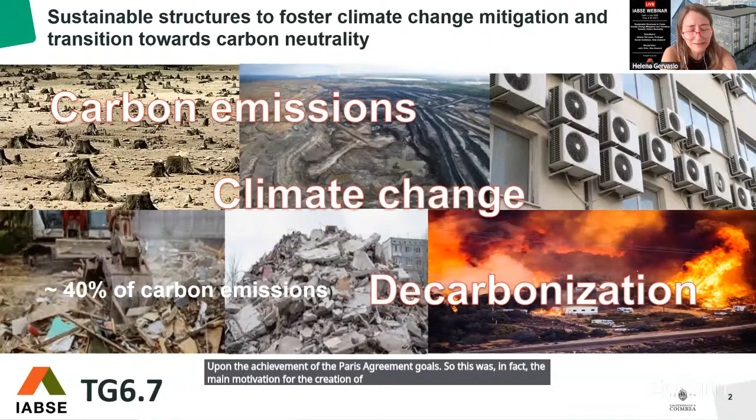So this is in fact a major problem of the construction sector, and we have a huge responsibility upon the achievement of the Paris Agreement goals. This was in fact the main motivation for the creation of this working group.

And although there is already a very big number of initiatives to lower emissions in the construction sector, as we can see here in the global building climate tracker, this dashed line represents our zero carbon building stock target in 2050.

What we are observing today is that we are getting further away from this line. If you see on the right side, we are currently 9 points behind this line. Compared with 2020, we are getting further away - okay, this was the pandemic year. So even if we forget about this, if we look at 2019, even here we can see that we are getting further away from our track. So it is really important - the reduction of carbon emissions in the construction sector is still a huge problem.

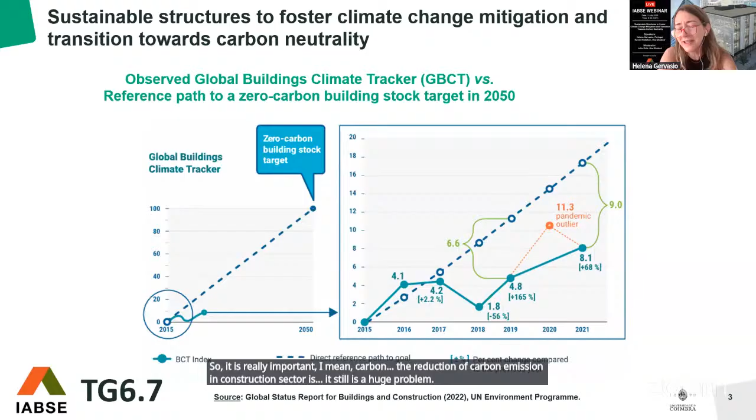As I said, this was one of the motivations for this task group. Our mission is to establish a framework for assessing the life cycle greenhouse gas emissions of structures and to foster the transition towards a low carbon built environment. We will also deal with other relevant emissions, because although greenhouse gas emissions are very important, there are trade-offs between environmental impacts, so we will also focus on highlighting other environmental impacts important for the construction sector.

So we created some topics for discussion among our task group. For instance, strategies to halt greenhouse gas emissions, focusing on the design of low carbon structures - and today we are going to hear about this as well. Also to identify main barriers and opportunities towards climate neutrality and sustainable construction, methodologies and tools for the life cycle assessment of construction works, and carbon environmental footprint and benchmarking of civil engineering structures.

I just want to highlight that our goal here in this task group is mainly focused on buildings. This is because there is already another task group currently working on bridges and other infrastructure, so to not overlap the work of these task groups, we are going to focus mainly on buildings.

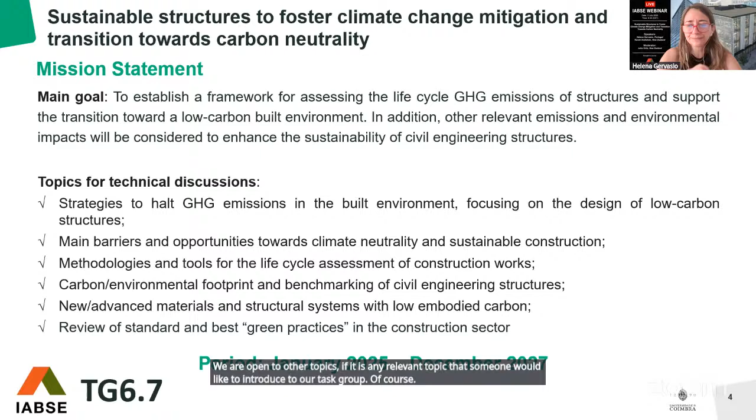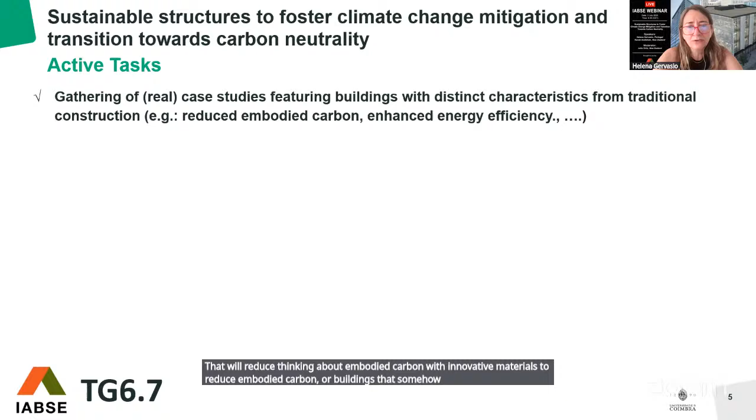Now I'm going to talk a little bit about what are the active tasks currently. One of the tasks now is gathering real case studies featuring buildings with distinct characteristic constructions - for instance, buildings that were designed thinking about embodied carbon with innovative materials to reduce embodied carbon, or buildings that enhance energy efficiency, close to net zero buildings, and so on.

The type of data that we are looking for is from design offices, from contractors, because we don't want to see only the production or construction stage, in terms of the type of build or material used, or design strategies - we would also like examples of construction practices in terms of the lifetime of the buildings, for instance adaptability, refurbishment, and so on. And of course, at the end of life stage, buildings that can be demounted, that are already being used, and so on.

So this is the kind of case studies that I would like. I call again to all of you watching today - if you are involved in design offices, working for contractors, and have access to such data that you're willing to share with us, please join us or contact us, because we really would like to build this collection of case studies. As Julie was saying at the beginning, one of our goals is to publish an IABSE publication with these case studies.

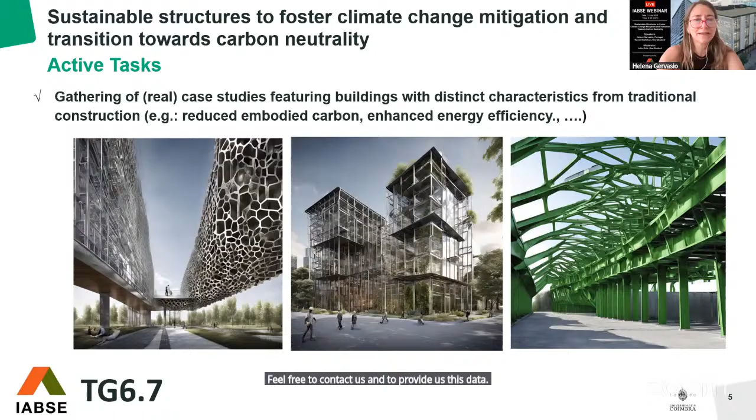So this will be one way also of promoting your work. Please feel free to contact us and provide us this data. So this is one of the active tasks.

The other task we are currently developing is the benchmarking of building structures. Here the approach will be the following: we would like to collect building data, but in this case general building data. I'm not focusing only on special types of buildings that differentiate from others. We are looking for all types of buildings, conventional buildings, but also good or improved buildings, if you wish.

But in this case, what we would like to have is not really the building as a final product. We would like to go into details, into the bill of materials of the building.

And why? Because we would like to produce some benchmarks, and to produce benchmarks, as you know, we need a common base for comparison. I suppose you are all aware that currently there are already some reference values all around the world for buildings, for the embodied carbon of buildings, for instance.

One of the limitations of the existing values is the way they were developed, because as far as I know there are already some databases for this kind of data. But as far as I understand - and this will be open for discussion - one limitation of the current databases is that they don't have the same basis for comparison.

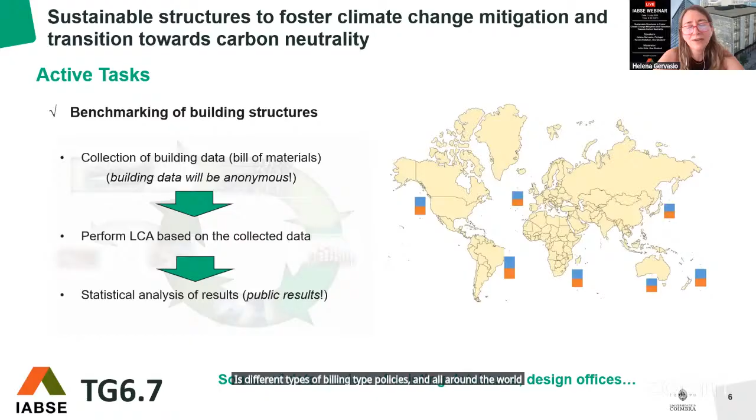So in the end, what we would like to have is this type of reference values all around the world, not for a specific place, because we know there are specificities around the world in terms of seismic area, for instance, and other loading conditions. So it is not possible to have a single value for the entire world, also for different building typologies. What we would like is different types of building typologies all around the world, so we can have these different reference values for the world.

Another active task is the review of guidance and recommendations towards a low carbon design of structures and infrastructure. There are many different guidance documents currently available, and the idea is to make a collection of this data and review it. We will review and discuss some of these guidelines, and promoting this kind of discussion is also one of the missions of our task group.

Over our period, we'll promote webinars and podcasts with discussions about these different strategies. The expected outcome, as Julio already explained, is first to provide guidance and recommendations. So we'll have a book with such guidance and recommendations based on the review we carry out, the discussion of the different available documents, and also a set of benchmarks for building structures. That will be one output, and the other output will be the portfolio of case studies.

So that's the first task I mentioned. In this case, we'll have this publication but with real case studies. That's why I said this is also one way of promoting the work that you are doing, so I think it's good for you to share your data with us.

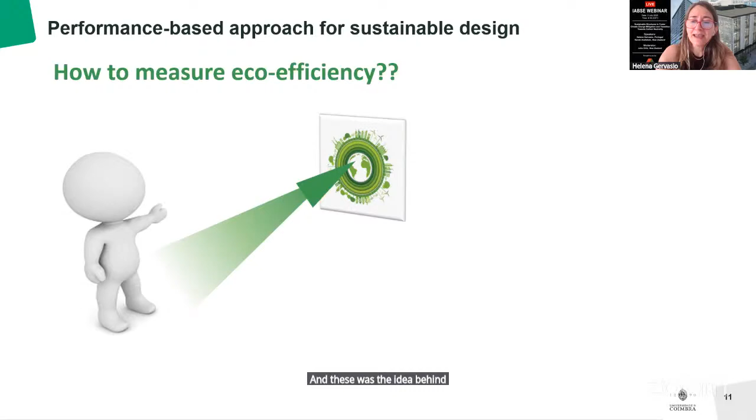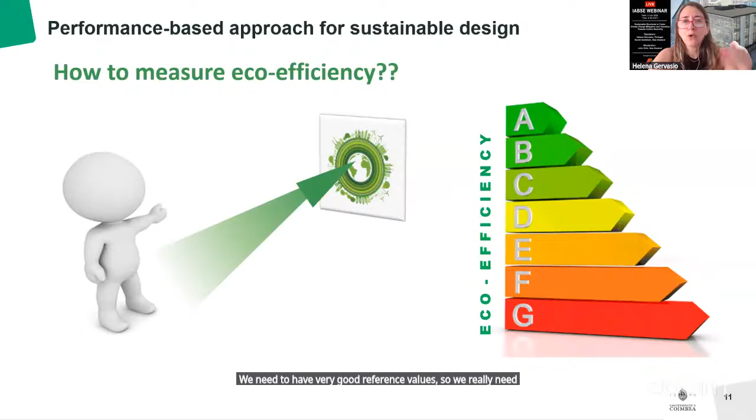The idea was to have a model for sustainable design in which we could compare the performance of our building with a reference value. This idea is based on a limit state function, which is the philosophy behind the Eurocodes for structural design in Europe. That is the limit state function in our Eurocodes.

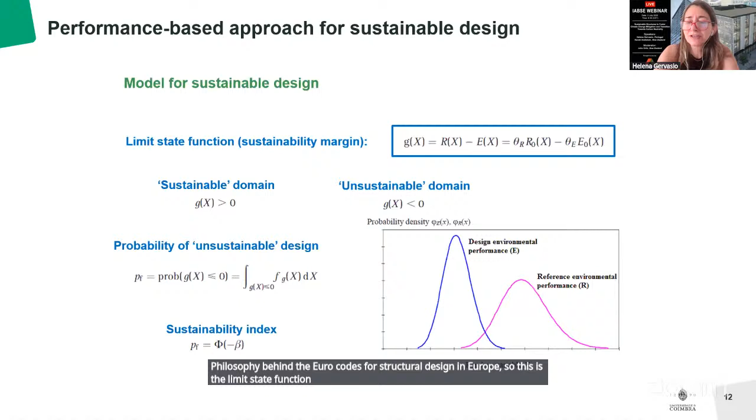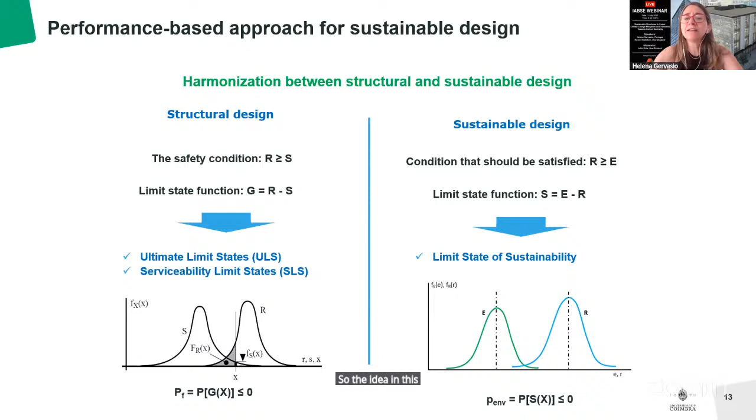The idea was also to harmonize structural design with sustainable design. As the Eurocodes in Europe are based on this limit state approach, the idea for sustainable design was also to have a limit state function. The main reason behind developing this approach was to harmonize structural design with sustainable design, empowering structural engineers to foster both safety design and sustainable design, aligning with environmental goals such as embodied carbon. So the idea in this project was really to define this limit state for sustainable design.

The methodology was somehow similar to the one I described for the task group. The first idea was to develop a comprehensive model for LCA, so a model was created so that all buildings were calculated based on the same model. A standardized approach was considered because we need a very good LCA model.

The model was developed according to the European Standards for Sustainable Design, EN 15804 and 15978. Based on this model, we collected building data, focusing on the structure. As in our task group, the idea was to limit the analysis to the structural system of the building, focusing on residential and office buildings. We collected data based on the quantities of materials for the structures, and according to the model we developed, we quantified the benchmarks.

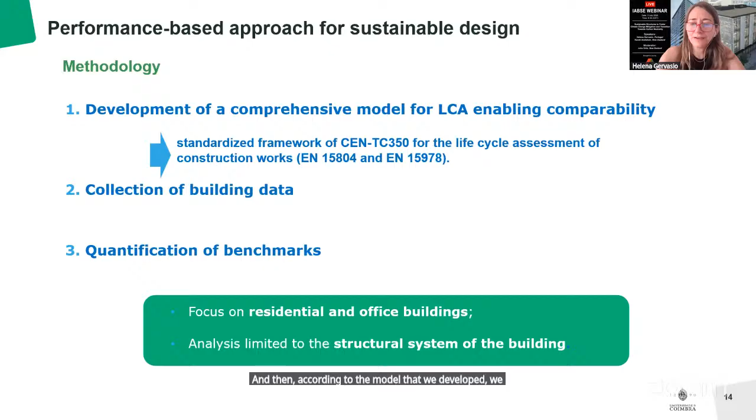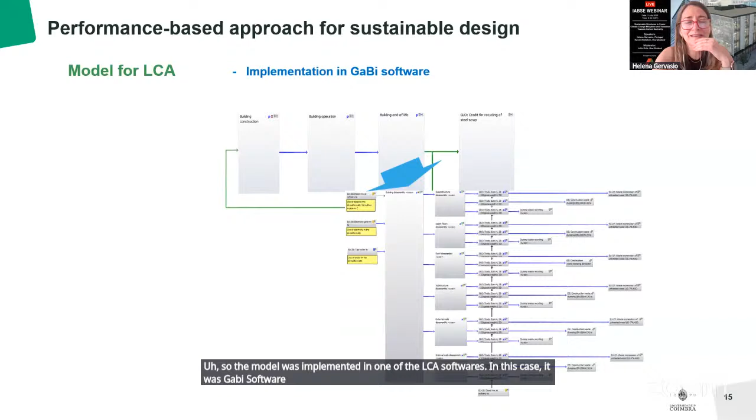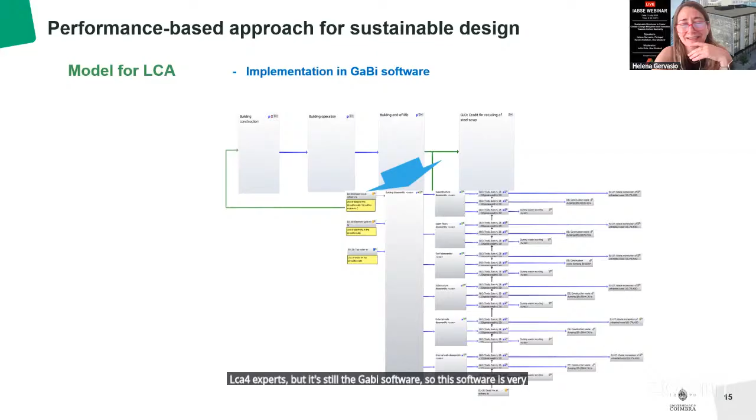The model was implemented in one of the LCA softwares, in this case Gabi software. Gabi has now changed its name, it's called LCA for Experts now, but it's still the Gabi software. This software is very interesting for those familiar with it, because it allows you to create a parametric model, and this is one of the models we can also use in our task group.

This model takes into account the complete life cycle of the building, not only the production stage, according to the European standards. We have a standardized bill of materials. This bill of materials can be improved, and it will be improved in our task group before sending it to potential contributors. But it already allows us to perform the LCA of the building.

This kind of tool ensures that we have the same basis for comparison. The results from the models will be based on the same tool, and this ensures that we have the same basis for comparison.

This model also integrates different types of materials, we are not only focused on one type. This is also the idea of this webinar today: to call for persons involved in all types of construction - steel, concrete, wood construction. We'd like to have all these types of buildings in our task group.

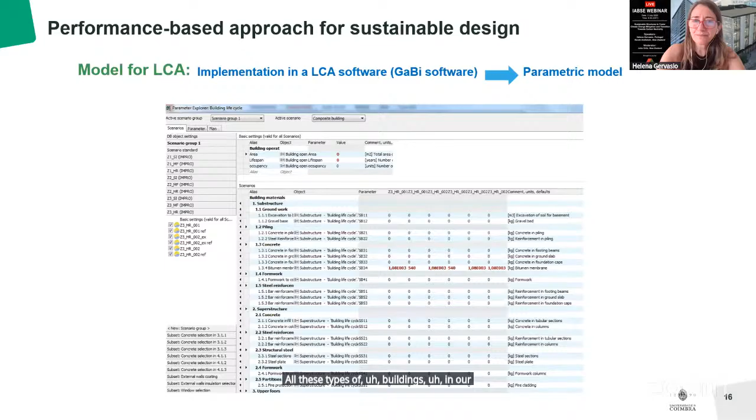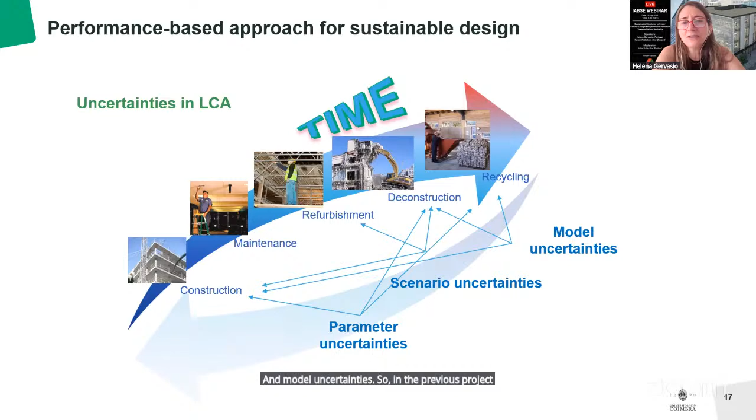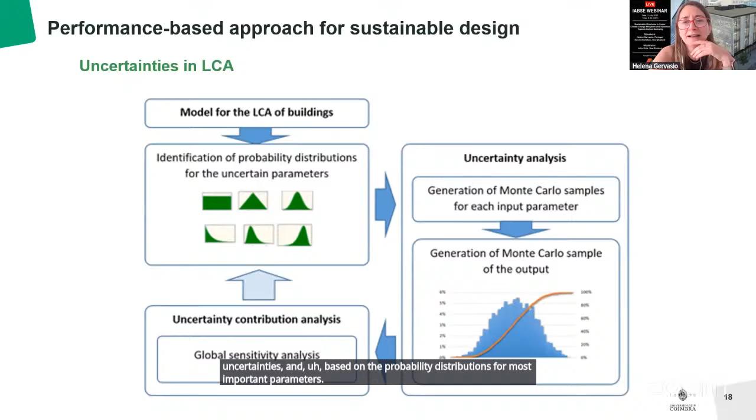For the model that was developed, because it was based on the life cycle approach, we know this approach cannot skip the amount of uncertainties involved in terms of parameters, assumptions, scenarios, and model uncertainties. In the previous project this was taken into account - we considered the different types of uncertainties, and based on probability distributions for the most important parameters, the uncertainty analysis was carried out by Monte Carlo simulation.

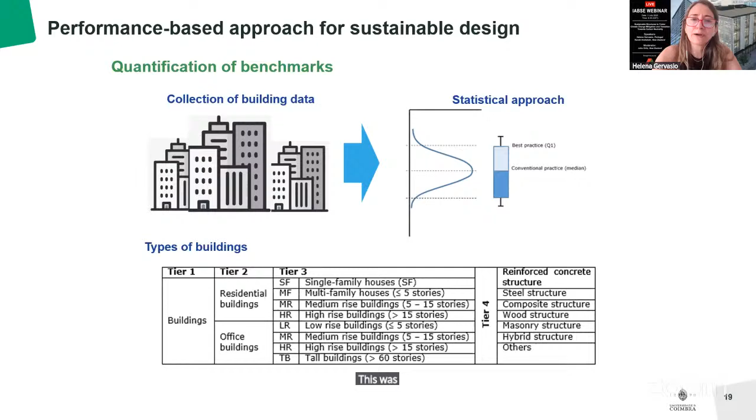Based on the collection of case studies and the statistical analysis carried out on the different buildings, the buildings were classified according to the table you see below. The focus was residential and office buildings, but then a different classification was done in terms of the type of building, the number of floors, and the type of structure - whether reinforced concrete, steel, composite, and so on. This was the type of data we were looking for at the time, and that we are looking for now as well.

As I said, it's not possible to have just a single value for the entire world, because there are differentiation factors. For instance, climate region is not that important in terms of the structure itself, but it can be an impact factor. We also have different seismic regions - just in Europe, but around the world as well - and the structure is very much dependent on this. We cannot compare a structure designed for a building with high seismic risk to one with low risk, so we have to take into account these differences, and also other vulnerable regions, for instance in terms of climate change, which we are expecting to change as well.

Even the Eurocodes now are already taking this into account, and we have to consider this too. This approach can somehow be considered as a national annex. So in terms of the Eurocodes for structural design, we already take into account differentiation factors—each member country in Europe has their own national annexes where specific aspects are considered. The same can be considered for the sustainability limit state.

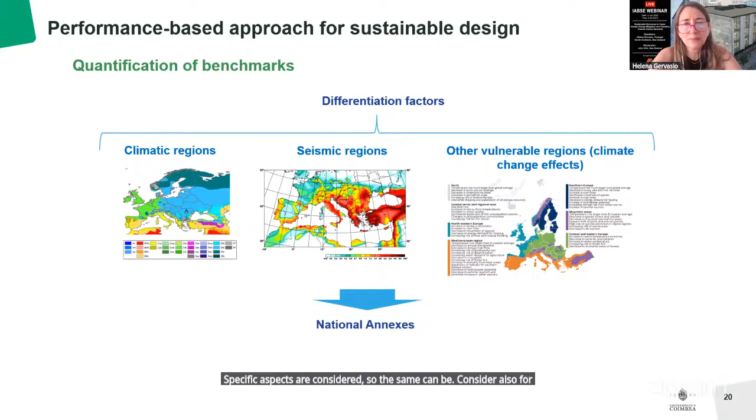A4, A5 is the process stage. Modules B are for the use stage. Module C1 to C4 is for the end of life stage. And module D allocates the benefits and burdens due to recycling and reuse of the structure. So we took into account the complete life cycle of the buildings, and that's why we were able to calculate the different values for different stages.

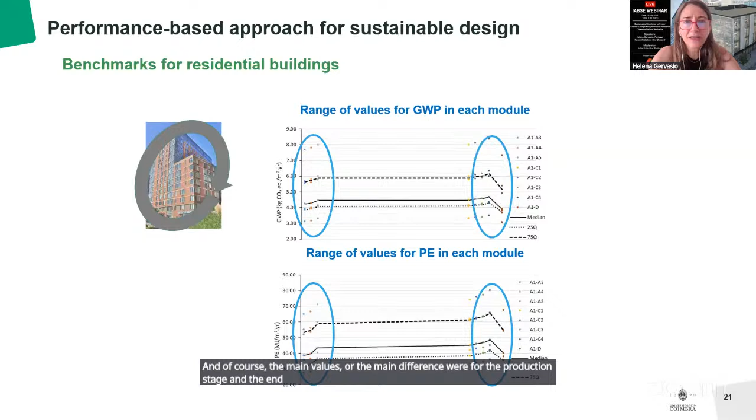In this case, on the upper part we have the global warming potential, the carbon emissions, the greenhouse gas emissions, and below we have the primary energy for each module. The main differences were for the production stage and the end of life stage. These were the values obtained for global warming potential and primary energy, focusing on the production stage and on the complete life cycle of the building, modules A1 to D.

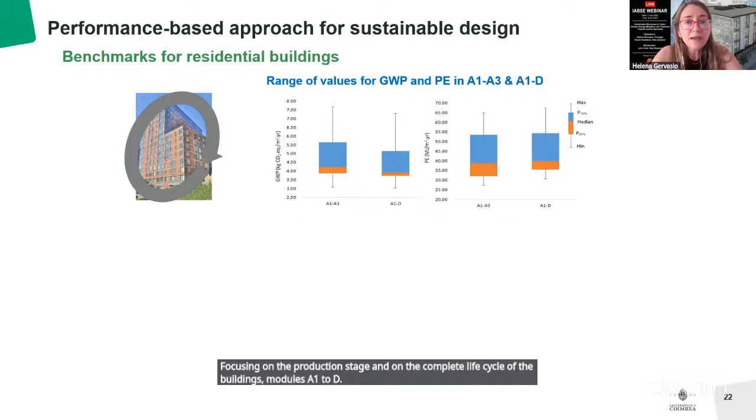But of course we carried out the LCA not only in the deterministic way, but also considering all the different uncertainties. The uncertainty propagation was carried out, as I explained, by Monte Carlo simulations, and then we got to the final distribution of the global warming potential values for the structure. We were focused at that time only on the structure of the building.

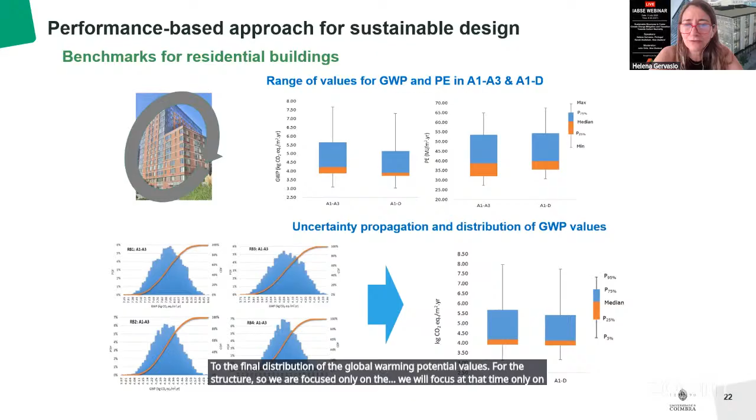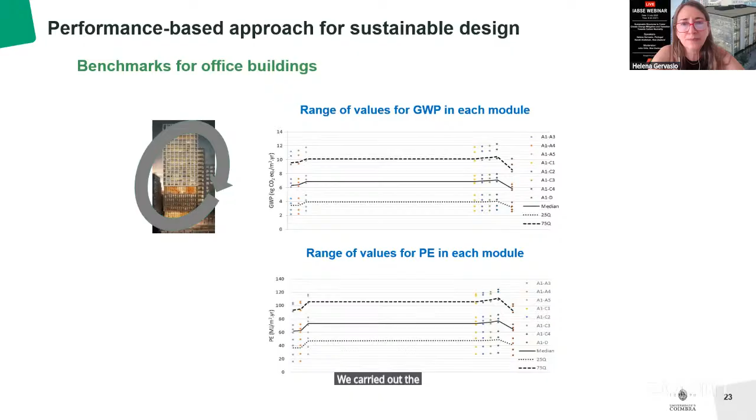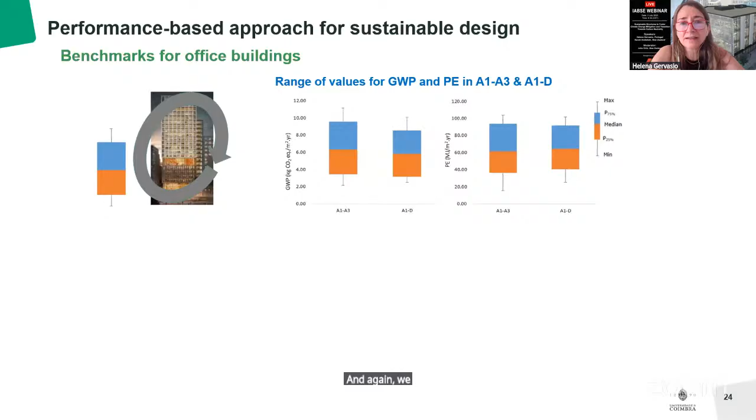And we did the same for office buildings. Again, we collected all the data and carried out the LCA of the office building, so we have values for all the different modules over the life cycle of office buildings. Again we carried out the statistical analysis, but we also took into account the uncertainties on the buildings, and then we got the final values.

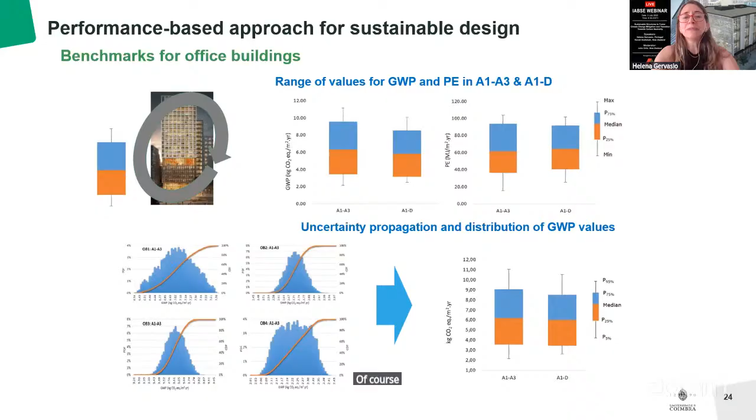Of course there were some limitations in the previous approach, and the main limitation was developing this resistant function, let's say—the resistant function here in comparison with structural design. So the resistant function in the sustainable design is our target value. How can we define this?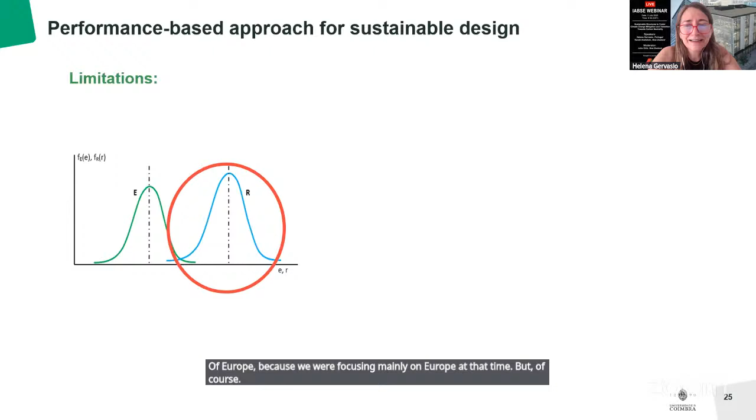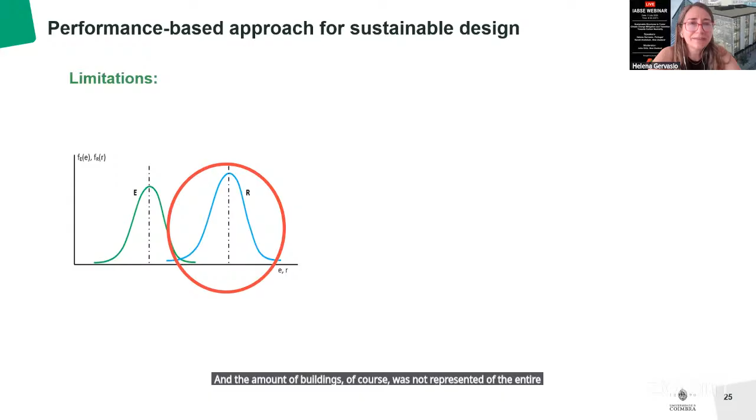In the previous project we collected building data, but the amount of buildings was not enough. The statistical analysis was limited because the sample of buildings we had at that time was not really representative of Europe, since we were focusing mainly on Europe. The time constraint was also a problem because the project took only two years, and the amount of buildings was not representative of the entire Europe. So this was one of the main limitations of the project.

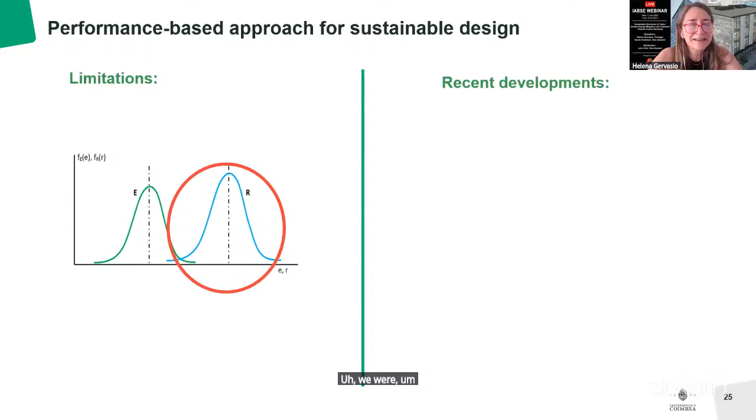There were already some recent developments done at the University of Coimbra. Currently we have new developments building on the previous project—for instance, for a special type of structure, industrial buildings, we have a very huge sample of such buildings. We did the design of many types of buildings, also using genetic algorithms, to create a very huge database of such buildings, allowing us to have a more comprehensive database.

So we were able to calculate the global warming potential of such buildings, and we have a resistant function for industrial buildings, but in this case it's mainly steel buildings. Based on this curve, once we have these target values, we can classify the buildings or establish some classes for the buildings, as I said in the beginning.

So once we have the target value, we can see where we want to be, whether in class A or A plus plus, or just go to the mean value. One big difference is between the structural limit states and the design limit states. In this case, we don't have collapse of the building, but we really want to be sure that our building has a very good performance.

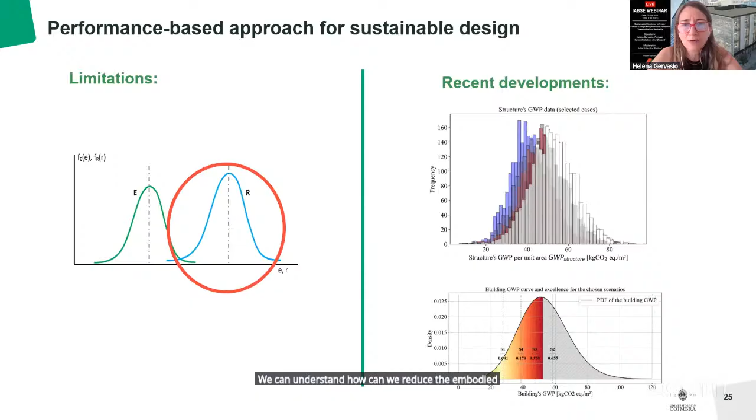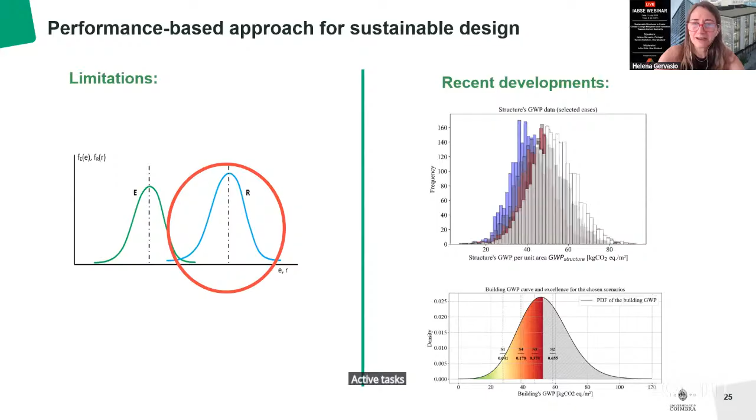With these kind of resistant functions, we can understand how we can reduce the embodied carbon of our buildings. This project was somehow supporting the approach that I was explaining, and this is one of the active tasks in our group. If you are interested, there are some publications from the previous project available online.

Today I'm going to briefly talk about some key results in our circular low carbon building design project, led by HERA and co-funded by Heavy Engineering Research Levy and Building Research Levy BRANZ New Zealand.

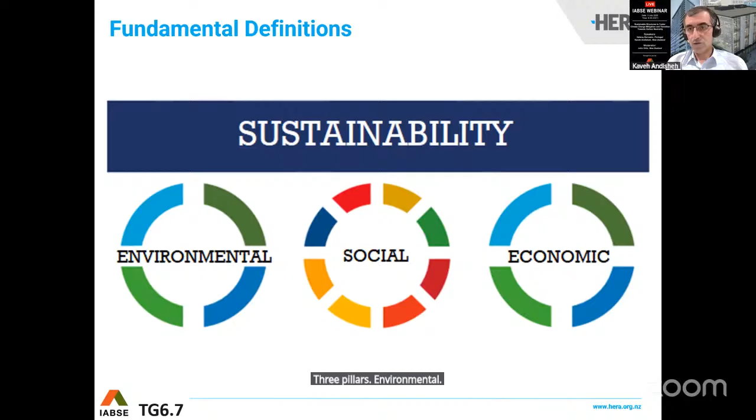I would like to start with fundamental definitions. The first, sustainability. Reminding that sustainability has three pillars: environmental, social, and economic impact.

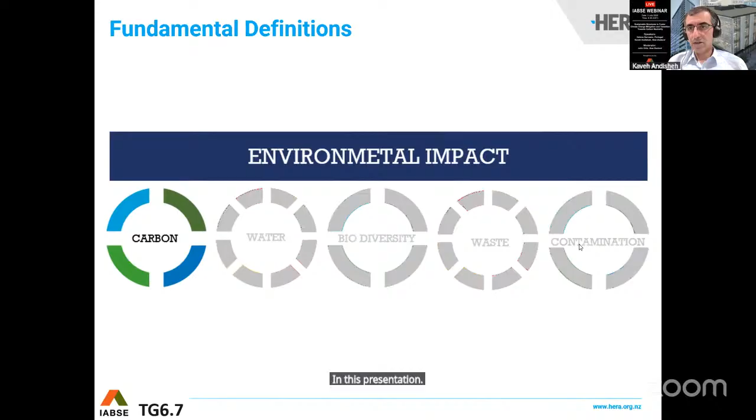Environmental impact has many key environmental indicators, including but not limited to carbon, water use, biodiversity, construction and demolishing waste, and contamination. In this presentation, we will only focus on carbon.

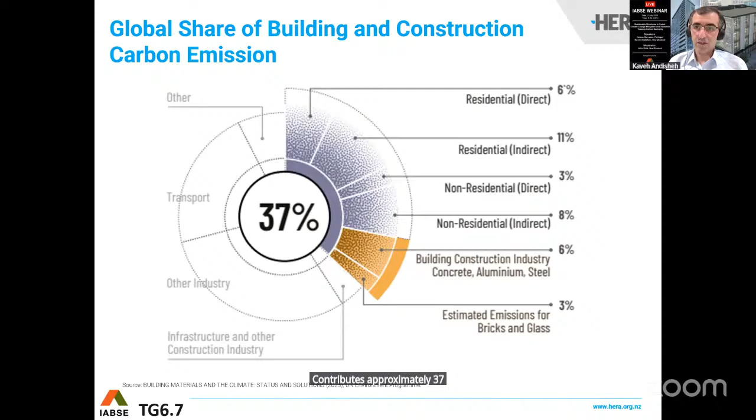Building and construction, as mentioned previously in the previous presentation, contributes approximately 37% of the global carbon emission.

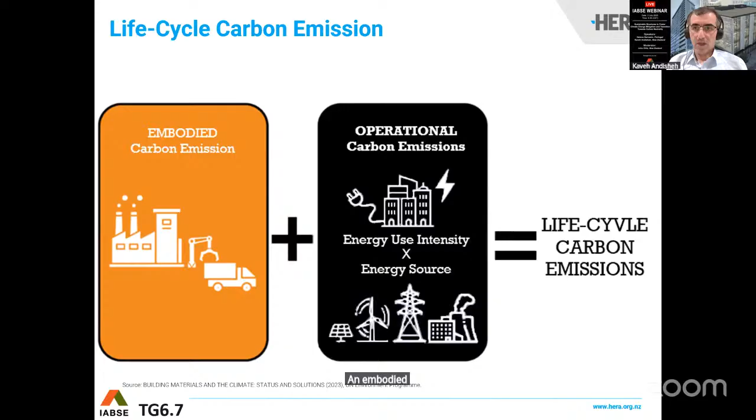When we talk about life cycle carbon, it has two parts: operational carbon emission and embodied carbon emission. According to UN Environmental Program and Global ABC, operational carbon is approximately responsible for 75% of the whole building sector carbon emission, and embodied carbon contributes the remaining 25%. Operational carbon is associated with B6 energy usage and B7 water usage, and embodied carbon is associated with all other modules in the life cycle.

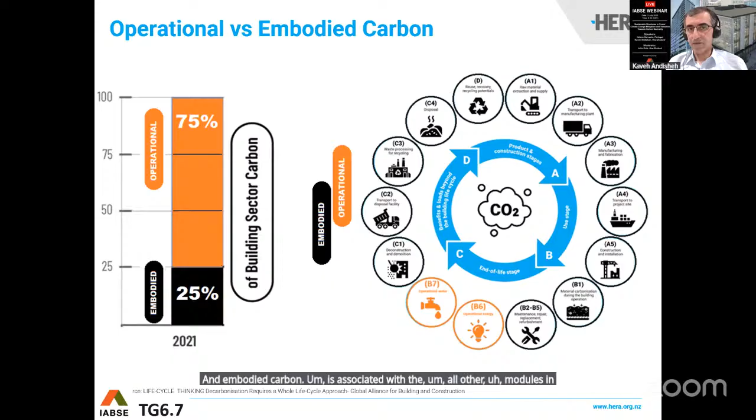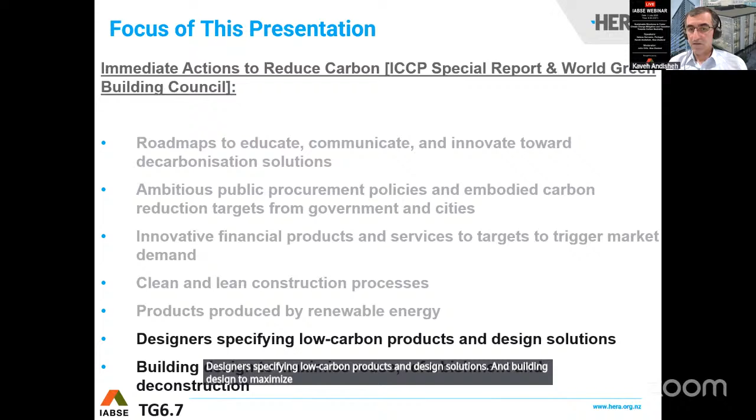The first one is building design. The main thing regarding building design is what design step you need to choose strategies and solutions to reduce carbon.

According to global feedback from industry, including New Zealand, the best optimum step to implement strategies and solutions is around concept design, before prelim design. One of the key reasons for this is that at project initiation, the ability to influence carbon is high, and the cost related to implementing solutions is low.

But as the project progresses, the ability to influence carbon reduces and the cost associated with implementing solutions increases. That's why the optimum stage for design is really important.

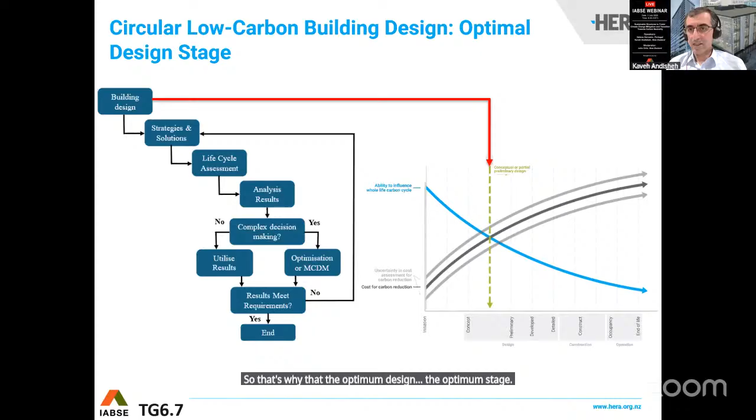The second key step, which is very important, is selecting appropriate strategies and solutions. In our research program, one of the key deliverables was the development of a comprehensive unified hierarchy, including all strategies for existing and new buildings.

Built on existing hierarchies in the literature like LETI and IStructE, this novel hierarchy of strategies can be categorized into 4 groups. The first group is 4D strategies for new building circular design: design for longevity, design for adaptability, design for disassembly, and design with circular materials.

The second group is 4R strategies for existing buildings: building reuse through retention or refurbishment, adaptive reuse of the building through repurposing, disassemble, reclaim and reuse in new buildings, and demolish, recycle and rebuild. Even if you need to demolish an existing building, this strategy encourages you to consider partial demolishing rather than demolishing the whole building.

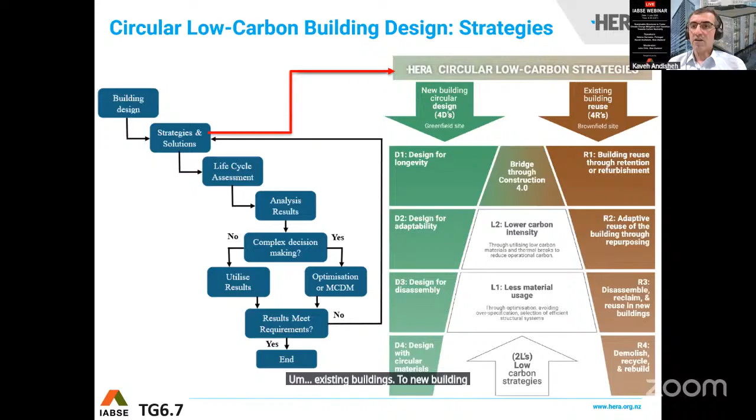Construction 4.0 has a hybrid role; like any other strategy it encompasses many solutions, but it can also bridge existing buildings to new buildings by utilizing novel technologies like, for example, digital twin, 3D scanning, drone. Construction 4.0 can contribute to development of construction guidance, which currently is one of the most critical gaps in the context of sustainable building design.

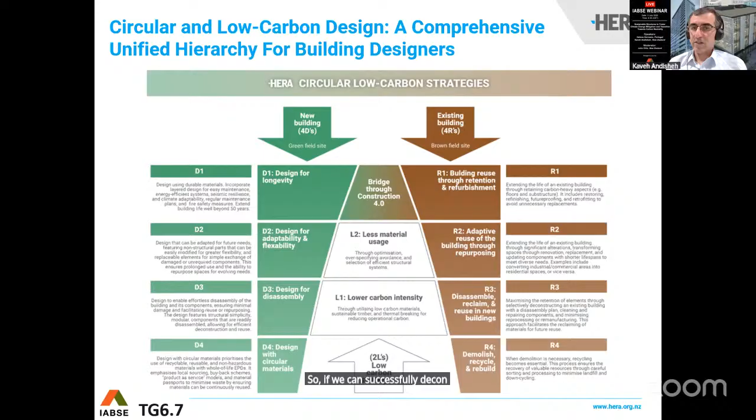And existing buildings can be deconstructed rather than being demolished. If we can successfully deconstruct existing buildings, their materials can be used in future new buildings. So each strategy encompasses several solutions. It was our intention in proposing these solutions to ensure they are readily available and possible to implement in New Zealand and globally.

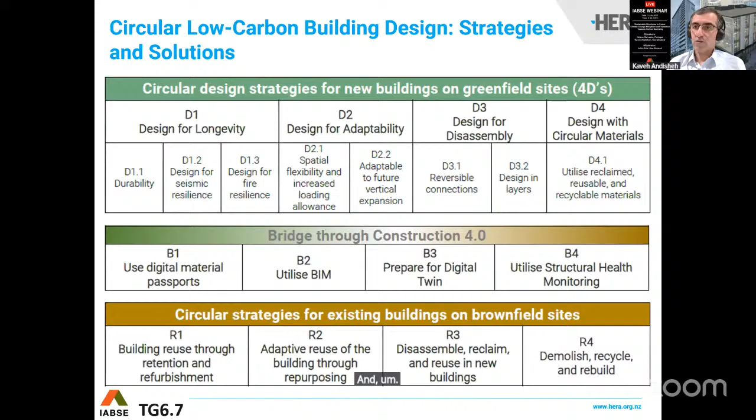So if you are interested, you can refer to one of our reports, R4-164, Low Carbon Circular Design Guidance Framework, which is free to everyone on our website. You can download it and read these documents for more information.

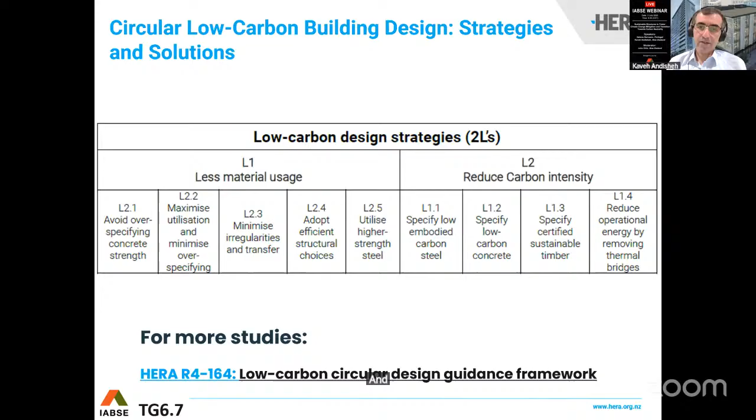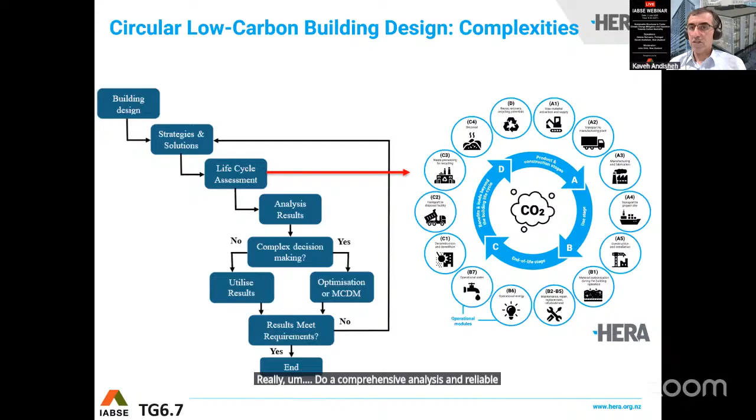The third step in circular low carbon building design is life cycle assessment, which is a key part. It is very important that when you do life cycle assessment, you consider the whole life cycle. Considering only a part of the life cycle, like A1 to A3 or A1 to A5, will just provide misleading information and doesn't provide comprehensive information. To do a comprehensive analysis and get reliable results, you need to consider the whole life cycle.

However, implementing circular low carbon building design may provide some complexities. One complexity is about the various environmental key indicators discussed in previous slides. We all agree that carbon reduction is important and carbon is a very important key environmental indicator, but it's not the only one. What about construction and demolition waste? That's very, very important. What about biodiversity? By adding these, we increase complexity.

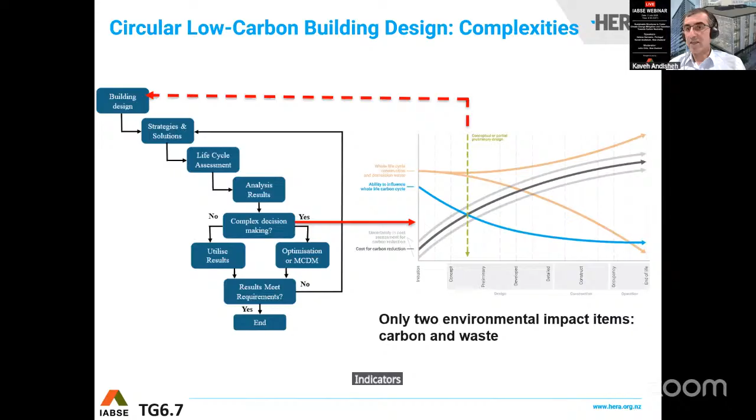For example, if you look at the figure on the right-hand side, regardless of what strategies and solutions you implement to reduce carbon, that may lead to an increase or decrease in construction and demolition waste. And if you consider other key environmental indicators, that complexity becomes even more important.

Another source of complexity can be due to tension between circular and low carbon design. Any circular solution may not provide a lower carbon solution, but low carbon strategies may not lead to circular solutions. An example is when you replace a circular building element with a low carbon element that is not circular. There is another source of complexity which arises when you replace materials and building and structural systems.

So when designers replace building and structural systems, they may significantly impact building performance - structural performance like seismic performance, fire performance, acoustic and durability performance. So the comparison wouldn't be an apple-to-apple comparison. It is important to acknowledge this complexity, and if there is a complex situation, you may need more tools and further advanced analysis to inform decision making, like multi-criteria decision making.

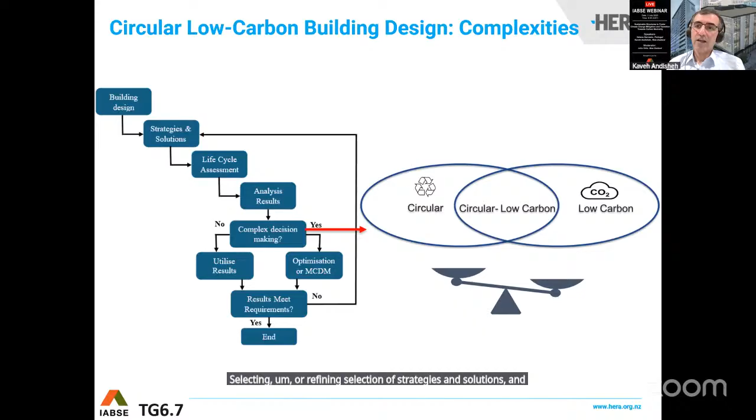The last step in the flowchart is comparing the results with the target. If results meet the requirements, then the process is completed. Otherwise, you need some iteration - you need to go back to selecting or refining the selection of strategies and solutions, and repeat those steps until results meet requirements.

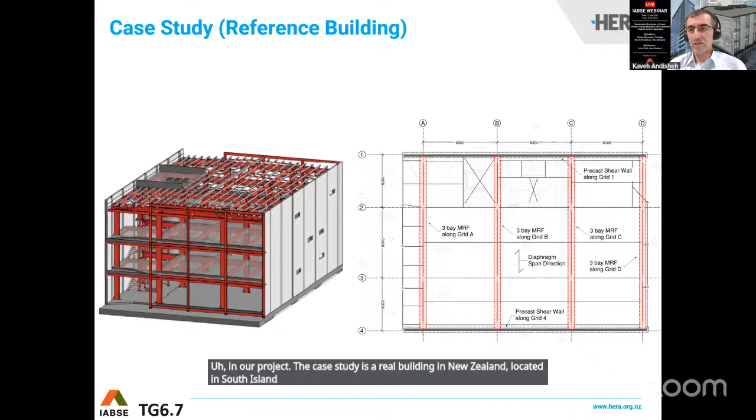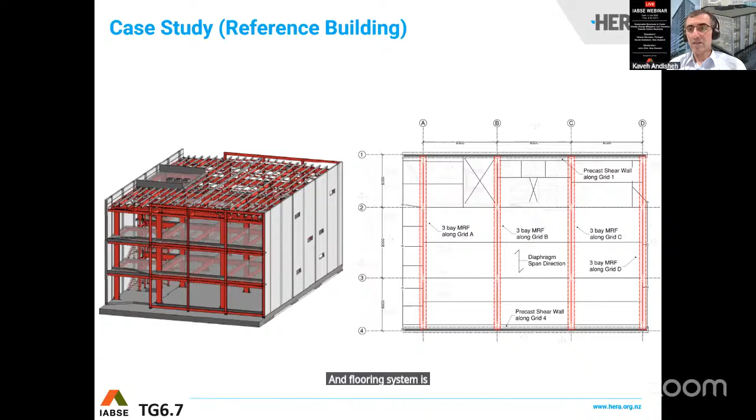Now I would like to go through the case studies and share some key results from our project. The case study is a real building in New Zealand, located in the South Island in Christchurch, built in 2013 after the Canterbury earthquakes. It's a 3-story office building. The lateral resisting system is a reinforced concrete shear wall in one direction, and a moment resisting steel frame in the other direction. The flooring system is a steel-concrete composite flooring system.

As discussed before, all strategies and solutions to reduce carbon can be categorized into two groups.

One group, which is complex group, you can't compare the scenarios because they are not apple-to-apple comparison. You need further tools and advanced analysis to inform decision making. But fortunately, there is a group of solutions and strategies that are uncomplicated solutions.

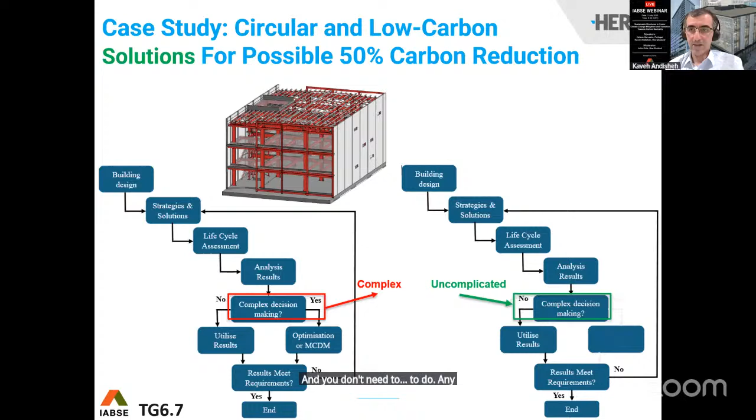With uncomplicated solutions, you can reduce carbon, and you don't need to do any further analysis. It is just straightforward. For superstructure, for the building case study, I have listed uncomplicated solutions, including reversible connections in the flooring system, specifying low carbon concrete, structural steel, and reinforcing bars. These solutions can reduce the whole superstructure carbon by 5%, 8%, 21%, and 17% respectively, with a cumulative carbon reduction of 51%. So by utilizing these uncomplicated solutions, it's possible to reduce carbon by 51%.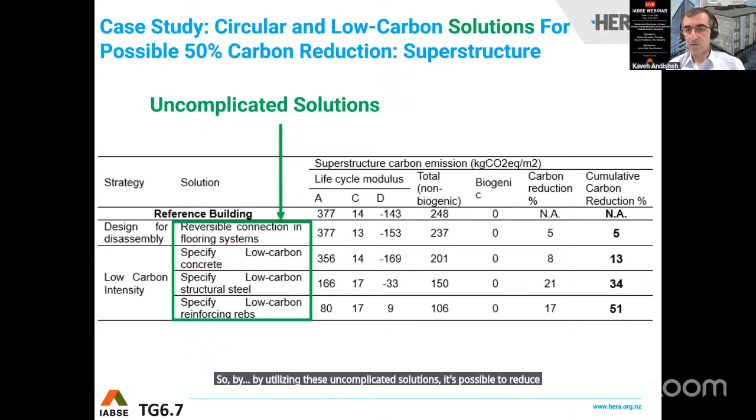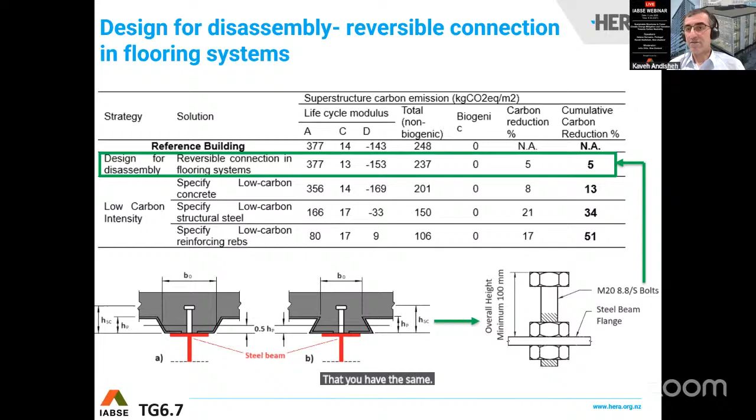The first solution, reversible connection in the flooring system, is just replacing welded shear studs with high strength bolts. We have full details and provisions in AS/NZS 2327, the New Zealand/Australia composite standard, and I'm sure you have the same in other global standards like Eurocode as well.

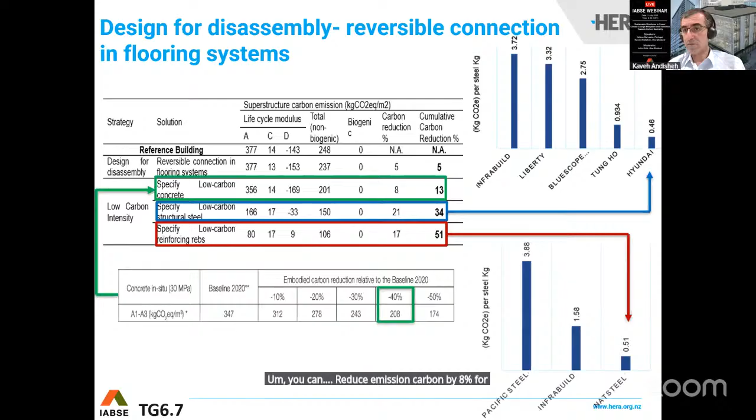The other solutions involve specifying low carbon materials, such as 40% carbon concrete, and also utilizing low carbon structural steel—you can see the comparison of the EPDs for low carbon and high carbon structural systems—and also using low carbon steel reinforcing bars, which are all available. You can reduce embodied carbon by 8% for concrete, 21% for structural steel, and 17% for reinforcing bar.

So let's move on to substructure. The substructure, the foundation of this building case study, is a raft foundation. Interestingly, the embodied carbon of the whole substructure is almost equivalent to the whole superstructure's carbon—95%, almost the same as superstructure. This emphasizes that it's important to consider the carbon of substructure.

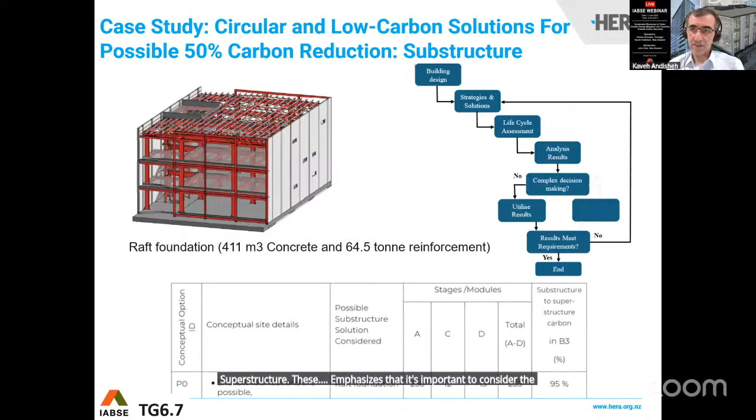So again, by utilizing uncomplicated solutions, using low carbon concrete and low carbon reinforcement, in this case study it's possible to reduce carbon emission by 62%.

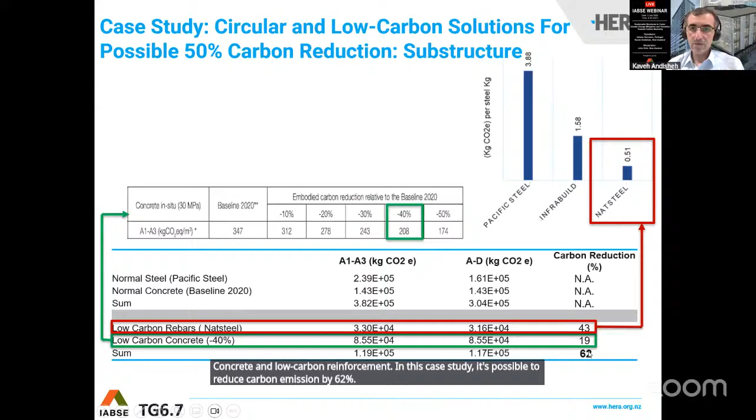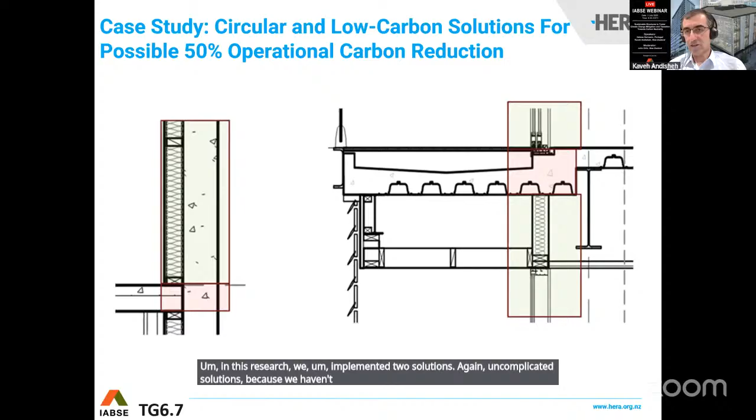So remember, we showed at the beginning that operational carbon is very important, and globally operational carbon is responsible for 75% of the building sector's carbon emission. So in this research, we implemented two solutions—again uncomplicated solutions, because we haven't changed any material, we haven't changed the structural systems. We just implemented a regulation, which is about increasing building insulation.

In New Zealand, we call it 2023 H1, and also installing thermal breaks, which is a global practice everywhere. So if the building case study used a boiler and air conditioning, then this insulation regulation, 2023 H1, and also installing thermal breaks, both can reduce carbon by around 60%.

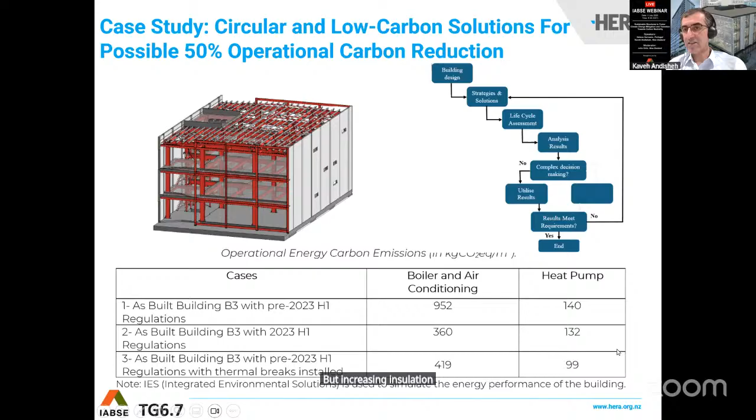However, if the building uses a heat pump, which is common in New Zealand and Australia, then installing thermal breaks can contribute to 30% carbon reduction, but increasing insulation will not significantly affect the operational carbon emission of the building.

So this brings me to closing remarks. I would like to advocate for sustainability, and I will remind everyone that sustainability has three pillars: environmental, social, and economic. A transition from low carbon to sustainable design is essential, which is one of our targets in this task group. A low carbon solution is not always a sustainable solution.

An example is when you replace a structural system with a low carbon structural system which negatively impacts other key environmental indicators and is a more expensive system—that alternative is not a sustainable solution, it's just a low carbon solution. We should understand the key differences between low carbon and sustainable solutions. We may achieve lower carbon, but we may negatively impact environment, economic, and social factors as well.

Optimization is important. In building design, it's very important to be efficient, not conservative. Conservative design will impact the carbon significantly. Engineers, especially structural engineers dealing with superstructure and substructure, need to understand their critical role in influencing the whole life carbon of the building. They need to be efficient and precise, and equip themselves with new knowledge and tools, staying updated with knowledge, tools, and skills.

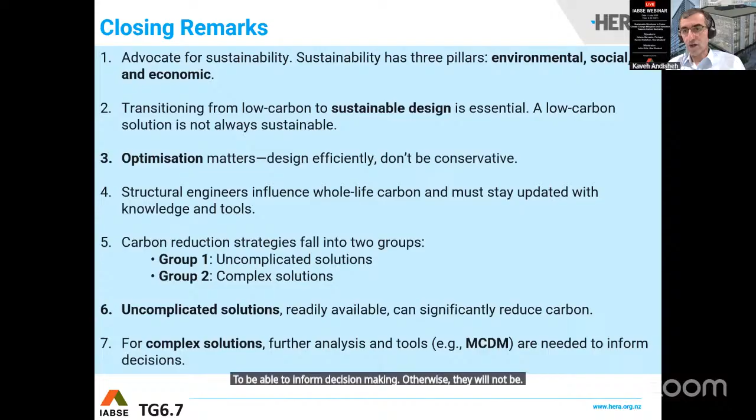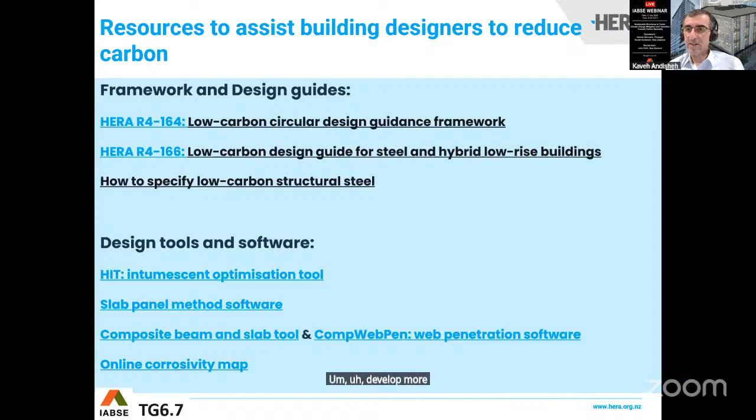In closing, I would invite everyone to check the task group 6.7 website and also the HERA website. We have several guidance documents and tools that can help you with reducing environmental impact and developing more sustainable built environments. Thank you, and I would like to acknowledge the funding and all the people who contributed to this research.